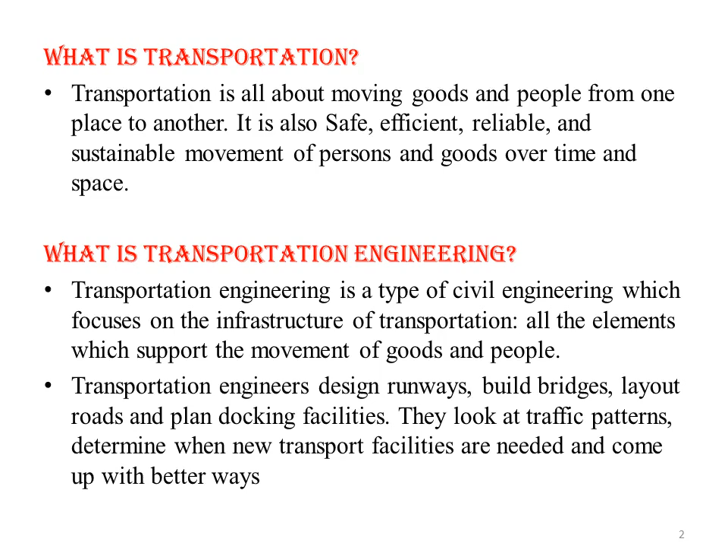Role of transportation in the development of nation. First is economic development. In economic development, every product needs transportation. If a better system is provided, it becomes easy and accessible to take the benefits of low costing of products. Availability of raw materials can be provided to manufacturing units.

Social effect. People of remote areas can come closer to the city or the town. People from different parts of the country can reach far places with convenience and in less time. Other effects. During the days of emergency, for example wars, an efficient and developed transportation system plays a very good role for quick and easy transportation of the soldiers, food and ammunition.

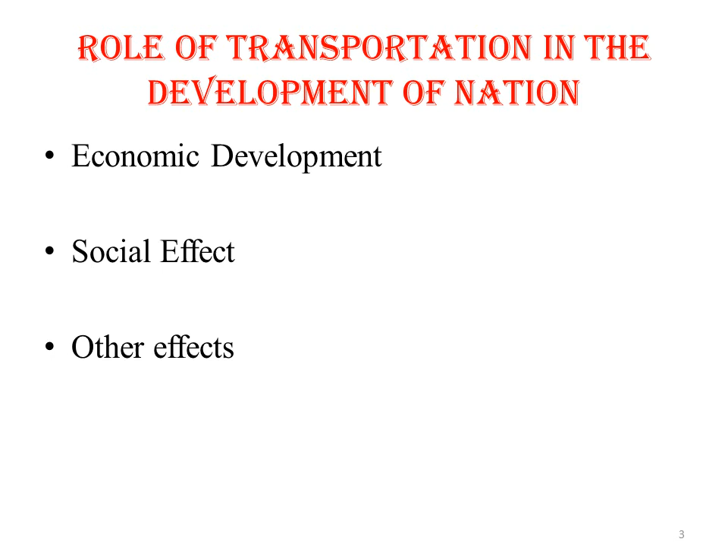Modes of transportation system. The transportation system is divided into four types: roadways, railways, airways and waterways. Roadways and railways come under land transport. So what do you mean by land transport? Land transport is divided into road, rail and pipeline transport. So one by one we will see.

First is road transport. This is one of the oldest and simplest forms of transport. It is largely used for carrying goods as well as passengers over a short distance. Rail transport. It is one of the cheap and quick forms of transportation system. It is used for carrying goods and services over a long distance. Pipeline transport. This mode of transport is used for the transportation of liquids and gases through pipelines.

Water transport. Water transport is one of the cheapest forms of transport. It is broadly divided into two types: inland transportation and ocean transportation. Inland transportation refers to transportation through canals, rivers, etc. This transportation deals with goods in small lots between villages and local markets.

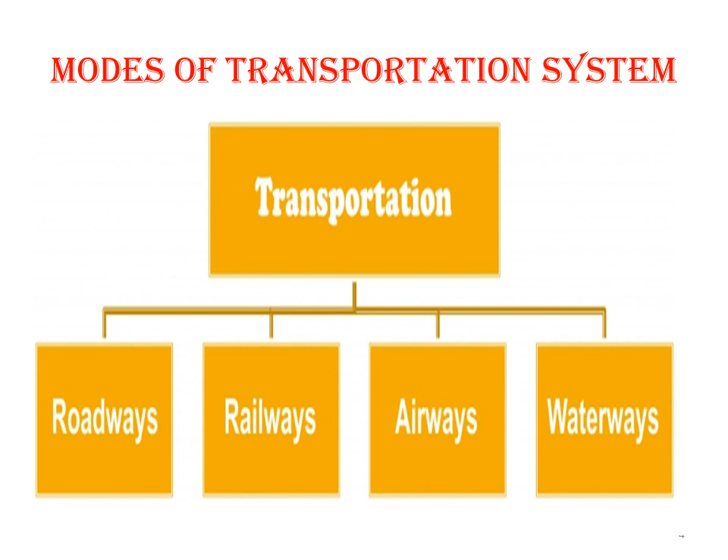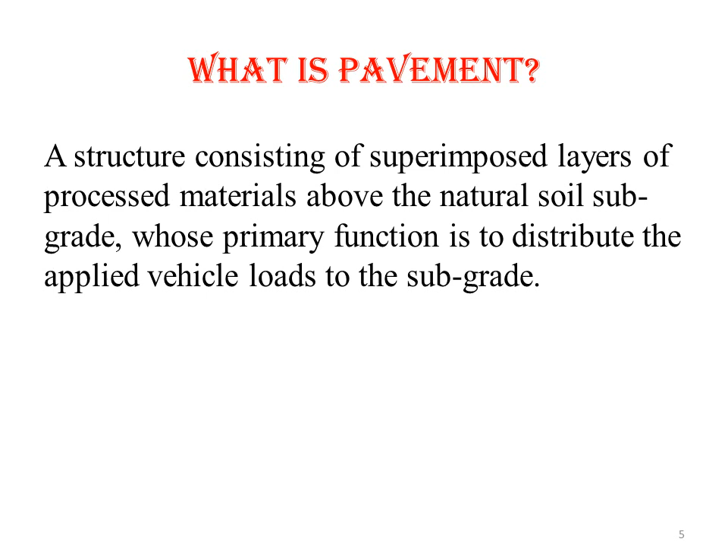What is pavement? A structure consisting of superimposed layers of processed materials above the natural soil subgrade, whose primary function is to distribute the applied vehicle loads to the subgrade. So pavement is a durable surface material which is laid down on an area intended to sustain vehicular or foot traffic, such as roadways and walkways.

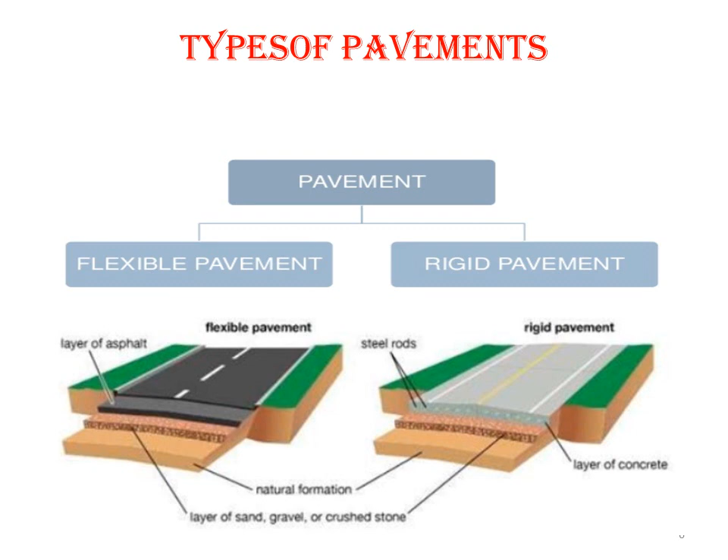What is transportation? Transportation is all about moving goods and people from one place to another. It is also safe, efficient, reliable, and sustainable movement of persons and goods over time and space. So transportation means the movement of the people and materials from one place to another.

What is transportation engineering? Transportation engineering is a type of civil engineering which focuses on the infrastructure of transportation, all the elements.

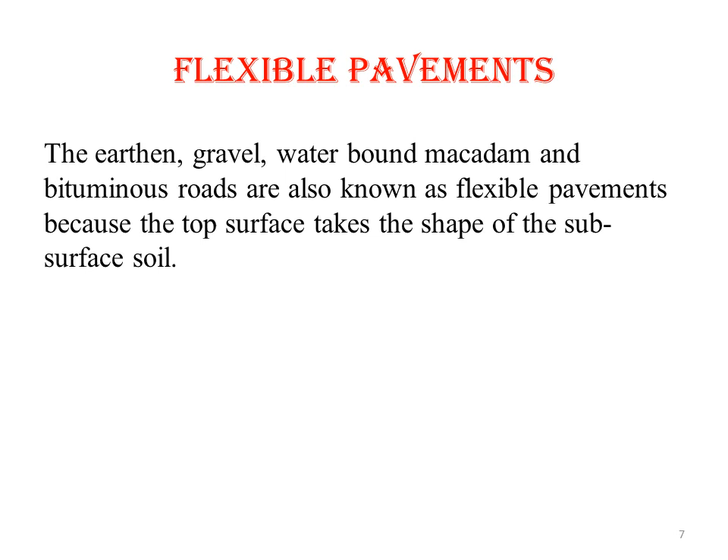So one by one we will see what do you mean by subgrade, then sub-base course, base course and surface course. Subgrade, it is the bottom layer and it is the foundation of the flexible pavement. The subgrade top layer has more stress and the bottom layer has less stress. Subgrade acts like a foundation. If the subgrade is not durable, the whole pavement will not be durable.

Now we will see sub-base course. It distributes the load to the subgrade because it is above the subgrade. It contains GSB layer and it also acts as a drainage layer, and it provides support to the base course and the surface course.

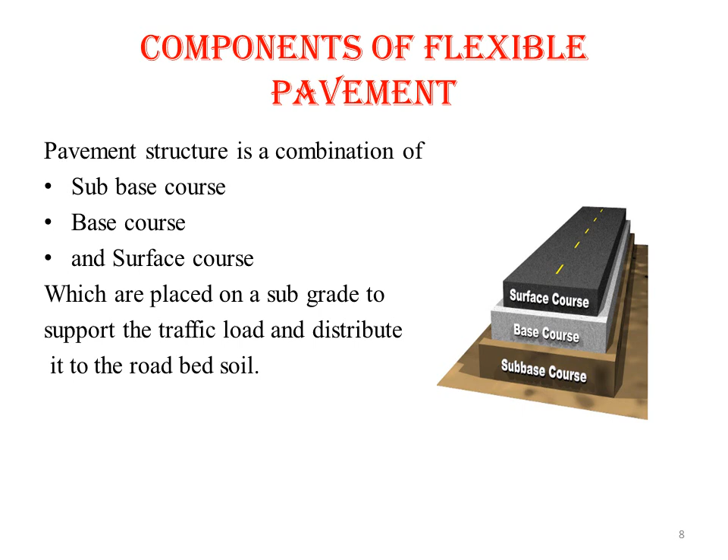So this is the image of the components of flexible pavements. At the bottom this will be the subgrade. Then on top of that will be the sub-base course, then the base course, and then the surface course on which the vehicles move. So this subgrade acts like a foundation to all these above layers.

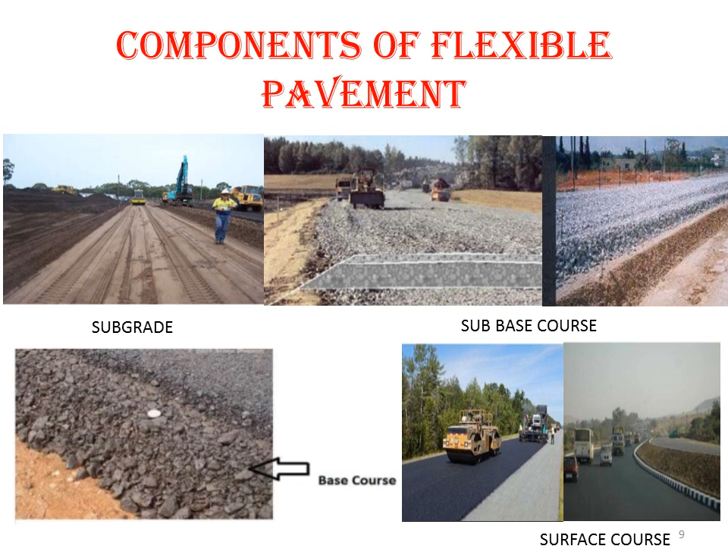Rigid pavement. Cement concrete roads are also known as rigid pavements because of their stiffness and their capacity to bridge over loose soil pockets in the subgrade. So rigid pavement is constructed from cement concrete, or it can also be constructed by reinforced concrete slabs. The design of rigid pavement is based on providing a structural cement concrete slab of sufficient strength to resist the load from the traffic.

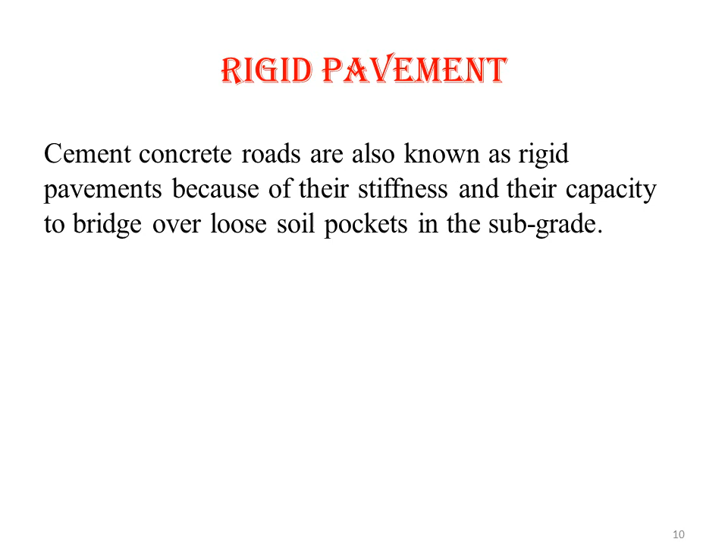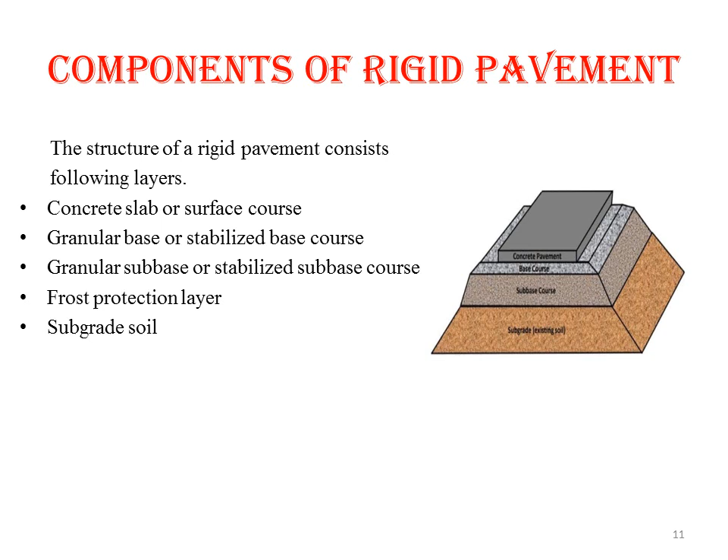So components of rigid pavement. These are the different images. Step by step the layers are shown, how they are constructed. First is the subgrade course, that is the bottom layer. Then the sub-base course, base course, and then the concrete slab. If the subgrade course is of good material or of good quality, then the sub-base course is not needed. Directly only three layers can form, that is the subgrade course, base course, and the concrete slab.

So the topmost layer, that is the surface course, this layer also comes in contact with the traffic load, as I told, and it is made up of RCC also, reinforced cement concrete. Here you can use two types, that is the plain cement concrete and RCC, reinforced cement concrete.

So it also provides the characteristics because it's the topmost layer and it comes in contact with the vehicles. So it provides friction, the layer is smooth, and it also controls the noise and the drainage. It also serves as a waterproofing layer to the underlying base, that is the sub-base and the subgrade. So here the base course is stabilized, and here it is in the form of granular material.